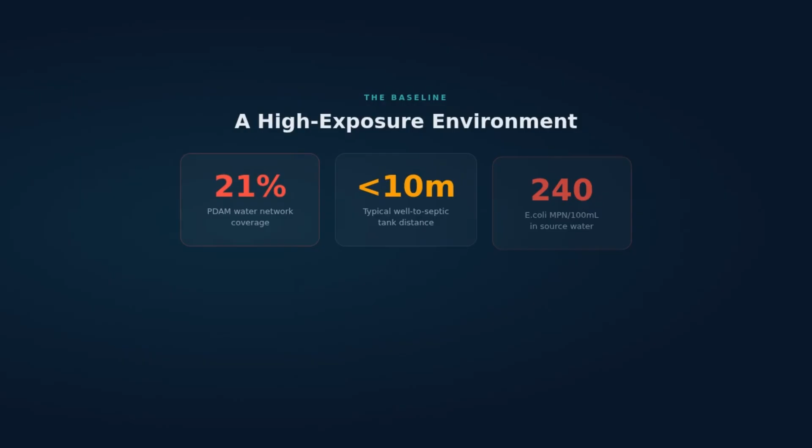Only 21% of residents have formal water service. Most rely on shallow wells less than 10 meters from septic tanks. When floods hit, source water shows E. coli at 240 per 100 milliliters against a standard of 0.

Across 4 disaster phases, clinic data tells the story. During peak flooding, diarrhea surged 79%. Infectious gastroenteritis and colitis emerged entirely new. This is infrastructure failure written in disease data.

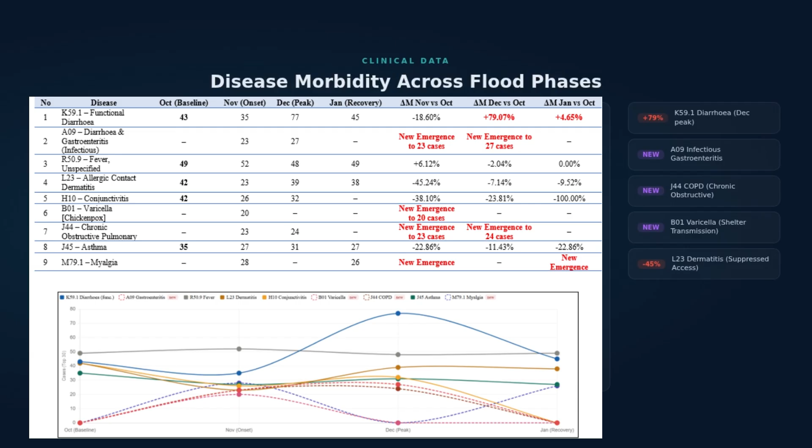Here is the critical finding. Every pollutant individually passes its standard, but sulfur dioxide, nitrogen dioxide, and PM2.5 all target the respiratory system combined. Their hazard index reaches 1.90, nearly double the safe threshold of 1.0.

4 targeted engineering interventions break the transmission chain. Rainwater harvesting bypasses contaminated water. A waste facility removes fly vectors. Drainage upgrades cut stagnant water. And a green belt filters particulate matter.

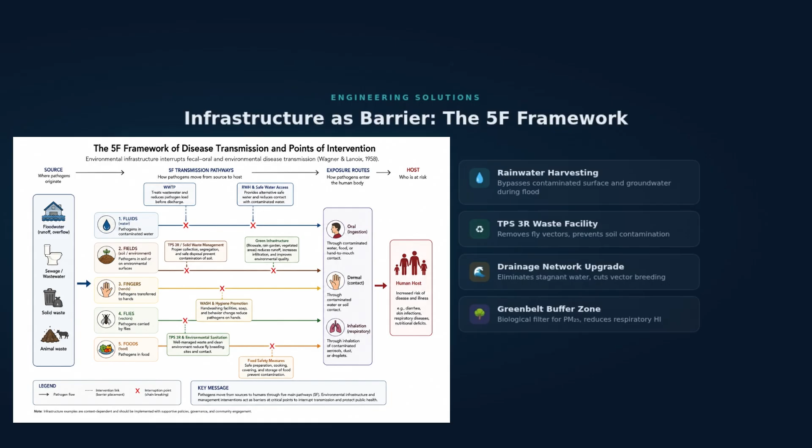Disease responds to cumulative exposure and system failure, not isolated parameters. Infrastructure as barrier - that is the engineering contribution.

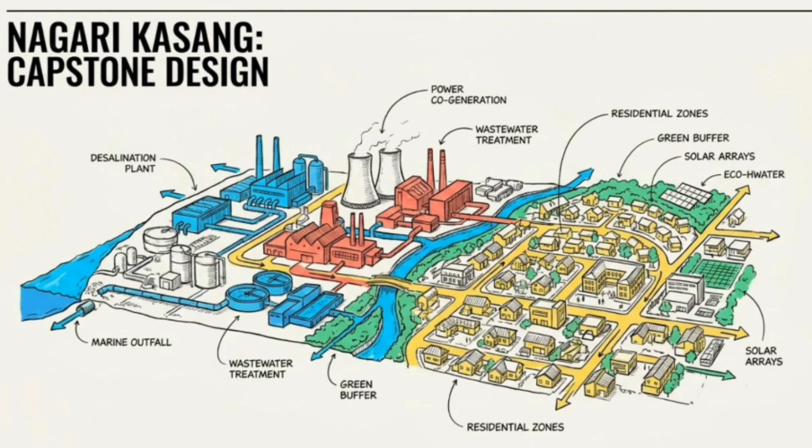Welcome to the breakdown of an integrated environmental infrastructure design. We're looking at a Capstone project centered on Nagari Kasang. The primary objective here is to engineer strict infrastructural solutions that build flood resilience directly into an industrial buffer zone.

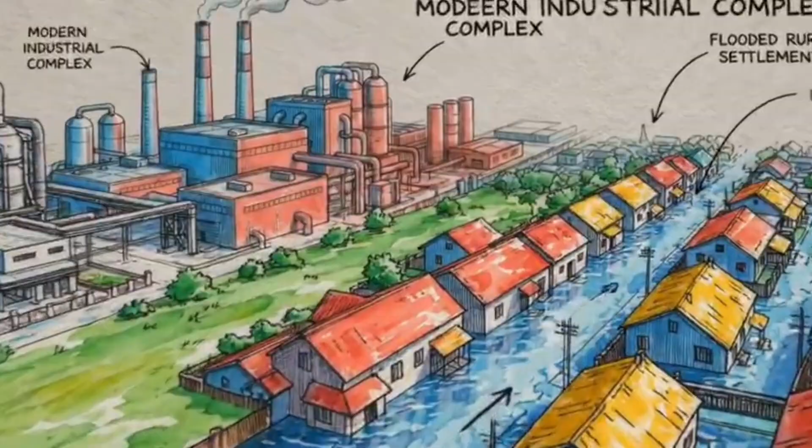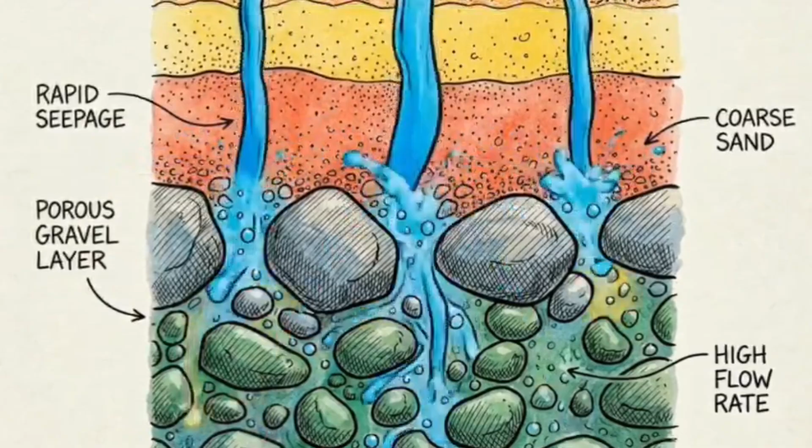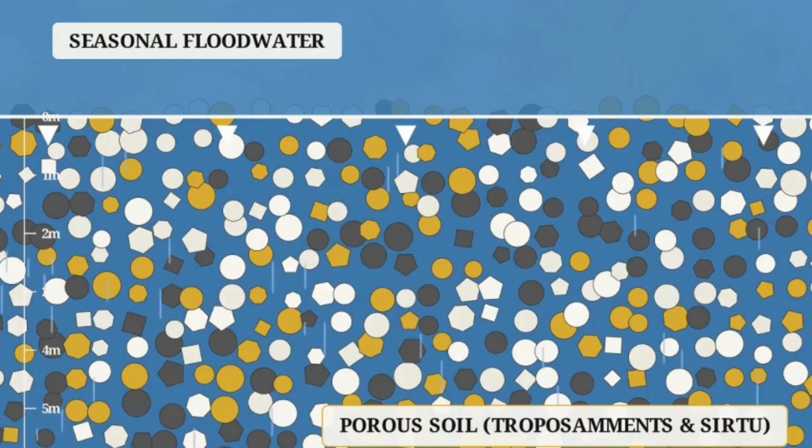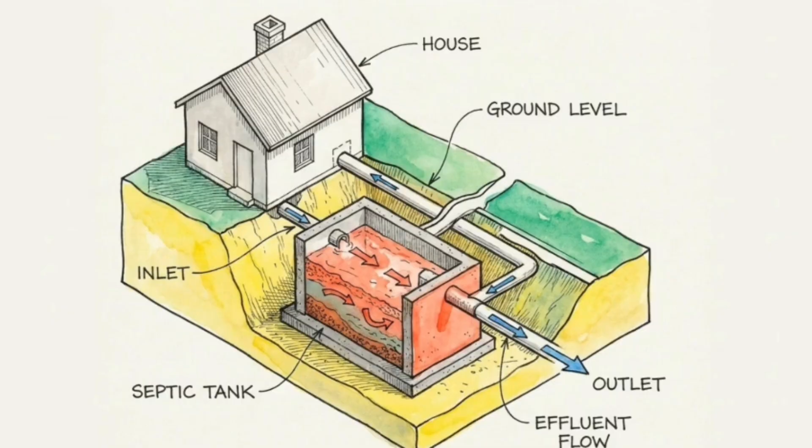Above ground, the demographic reality complicates things. Between 95 and 98% of homes here rely on basic, unsealed on-site septic systems. Combine those unsealed septic tanks with highly permeable soils, and you have a severe structural vulnerability. Any major hydrometeorological event instantly creates a massive risk for subsurface contamination.

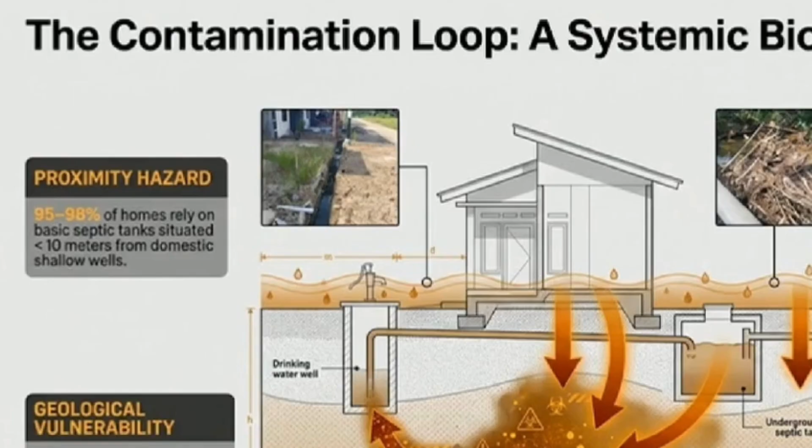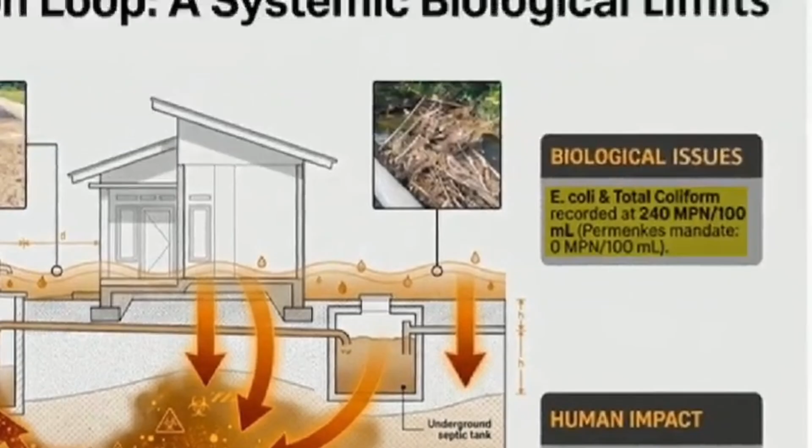Field surveys of the area revealed a specific, severe proximity hazard. This diagram details the proximity hazard. Septic tanks sit less than 10 meters from shallow drinking wells. In permeable soil, this creates a direct underground pathway for pathogens. Tests recorded E. coli at 240 mpn per 100 milliliters, obliterating the government mandate of 0.

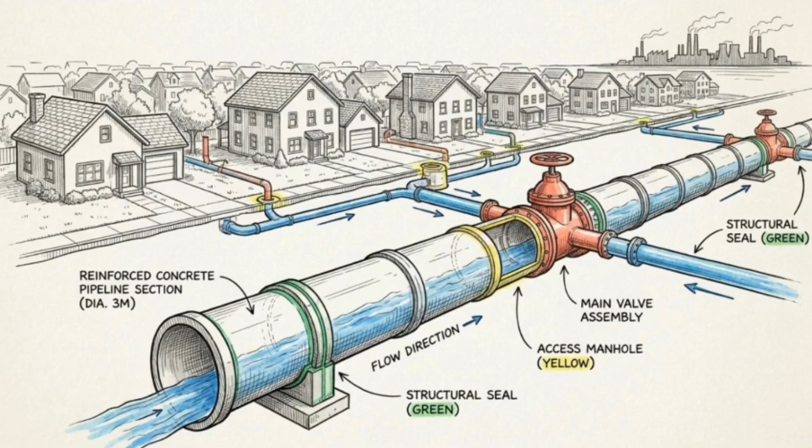To stop the pathogen cycle, a centralized engineering intervention is required. To translate these real-world field failures into viable infrastructural solutions, the team needed a rigorous methodology.

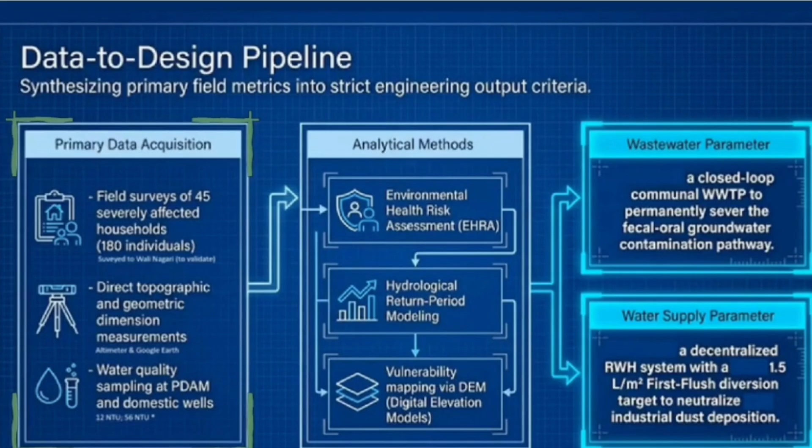This flowchart maps the data-to-design pipeline framework. It begins with primary data acquisition, pulling together household field surveys, direct topographic measurements, and water quality sampling. That data then moves into analytical methods, where a critical step is hydrological return period modeling.

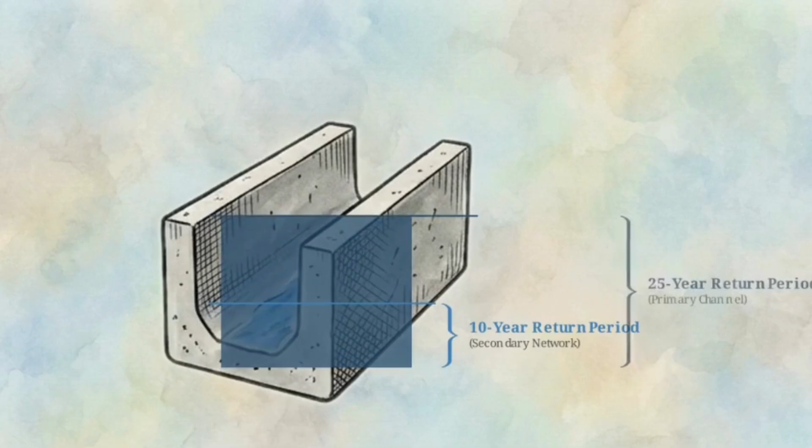The engineers selected strict criteria for this, applying a 10-year return period metric for secondary networks and a 25-year metric for the primary drainage channels. Adhering to those strict return period models establishes a non-negotiable zero inundation standard. Achieving that baseline is a prerequisite before any new wastewater or clean water facilities can be safely designed.

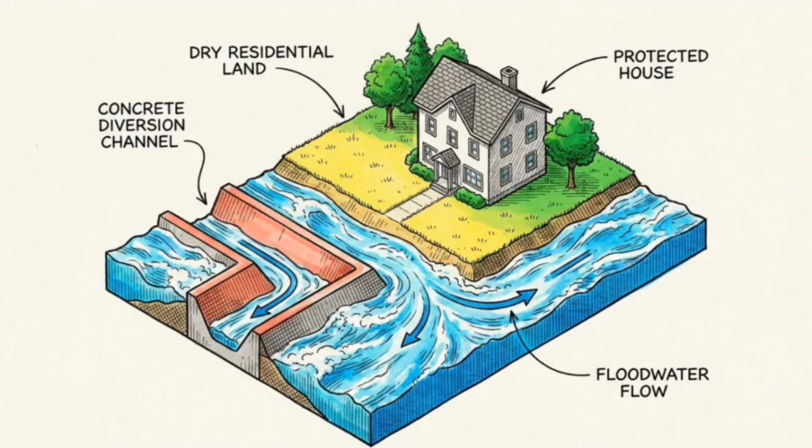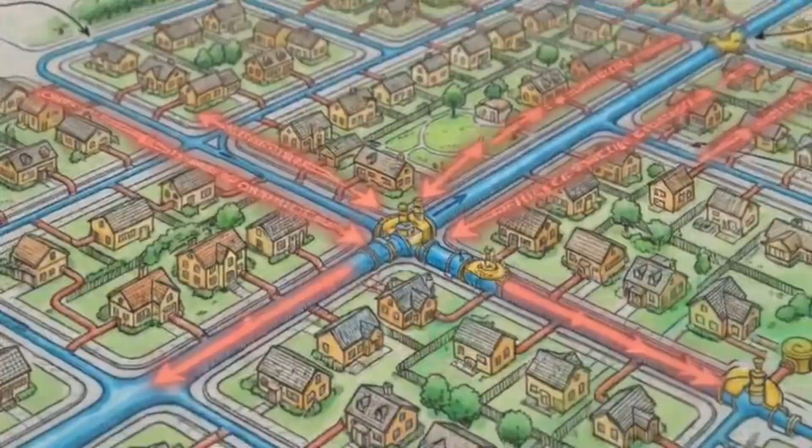The primary wastewater intervention removes the individual permeable on-site tanks entirely, replacing them with a centralized closed-loop network. This map displays the macro-level layout of the proposed communal pipeline network across Nagari Kasang. You can see in the system architecture details how this network definitively routes both gray water and black water away from highly permeable residential soil zones.

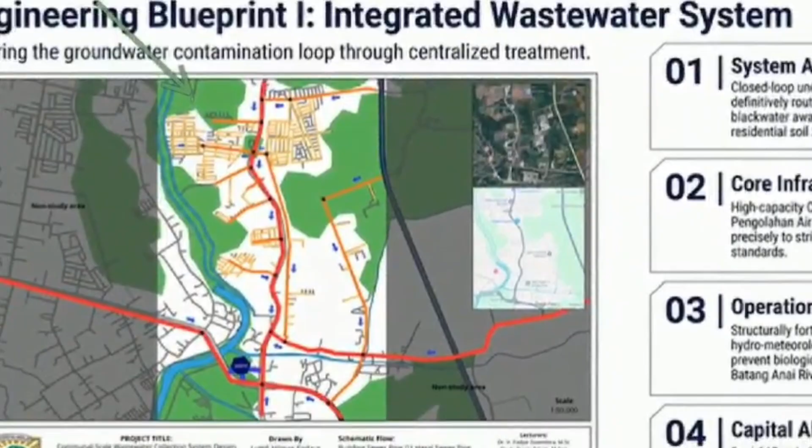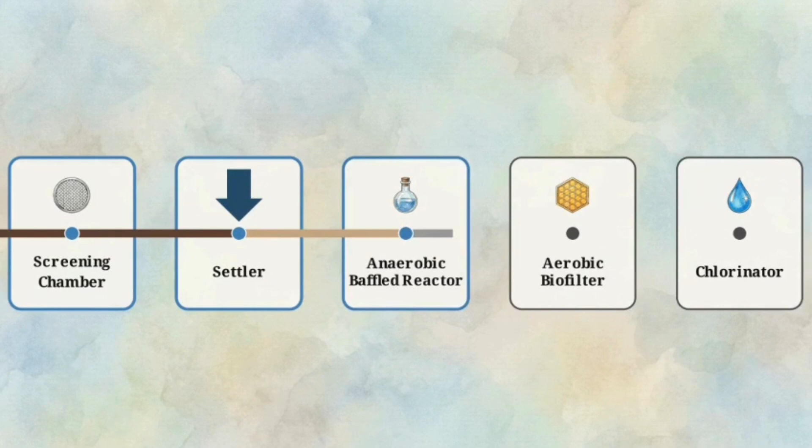The wastewater enters a central treatment plant through 5 stages. The screening chamber filters solids, passing to a settler for sludge. The anaerobic baffled reactor degrades organics. The aerobic biofilter uses a honeycomb structure for secondary reduction. Finally, a chlorinator neutralizes pathogens before safe discharge.

Translating that specific blueprint into reality requires strict capital allocation. The project outlines an allocation of 4.96 billion rupiah, dedicated strictly to excavation costs and the heavy-duty conveyance materials needed for the pipe network. An additional 3.58 billion rupiah is required for constructing the core processing facility itself.

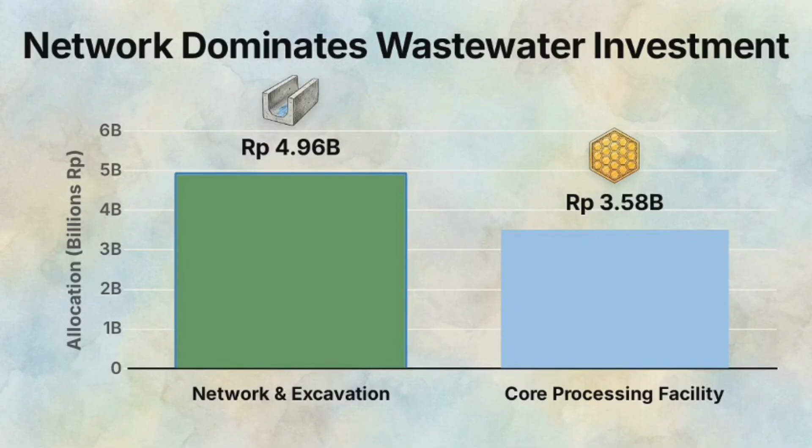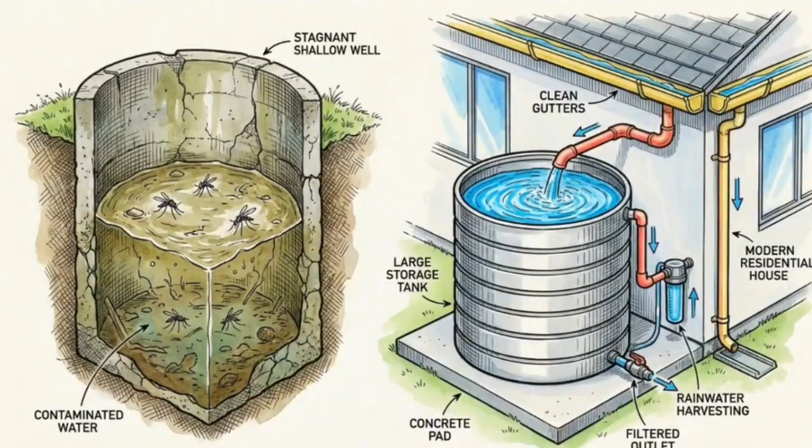Implementing this closed-loop, multi-stage pipeline design definitively severs the hazardous fecal-oral pathway that plagued the community's baseline data. With sanitation secured, the team engineered a secondary infrastructural intervention focused entirely on safe drinking water.

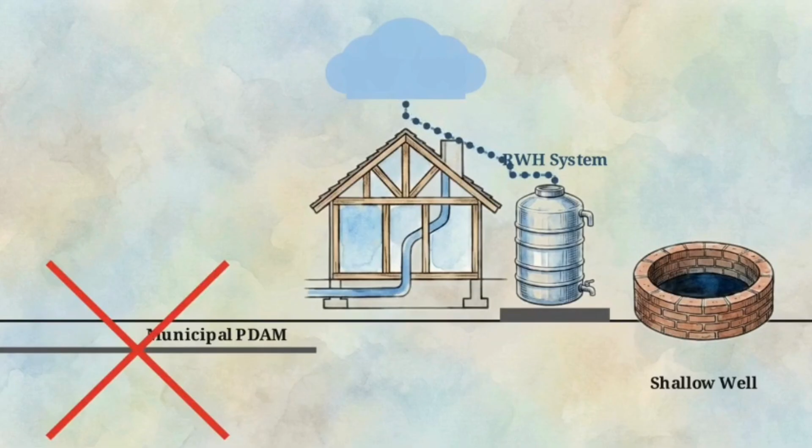The objective here is a decentralized rainwater harvesting system. It provides an emergency water supply that bypasses both the highly turbid municipal networks and the contaminated local wells entirely. The system is designed against a specific demographic load, serving 180 individuals across the 45 most severely affected households. To meet that demand, the system targets a strict operational capacity of 2,700 liters per day.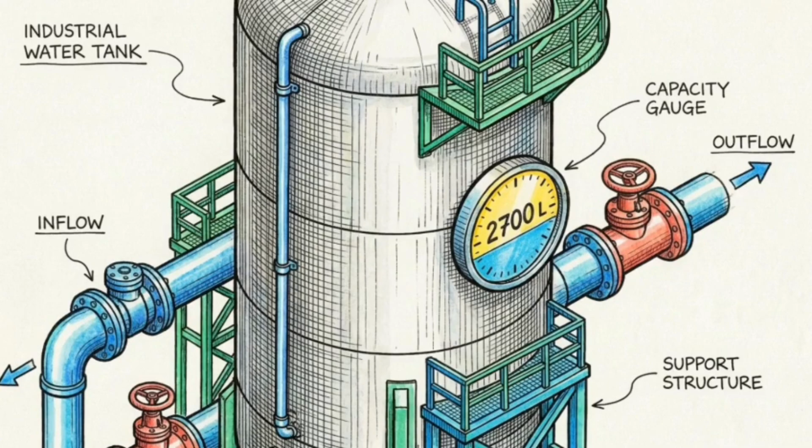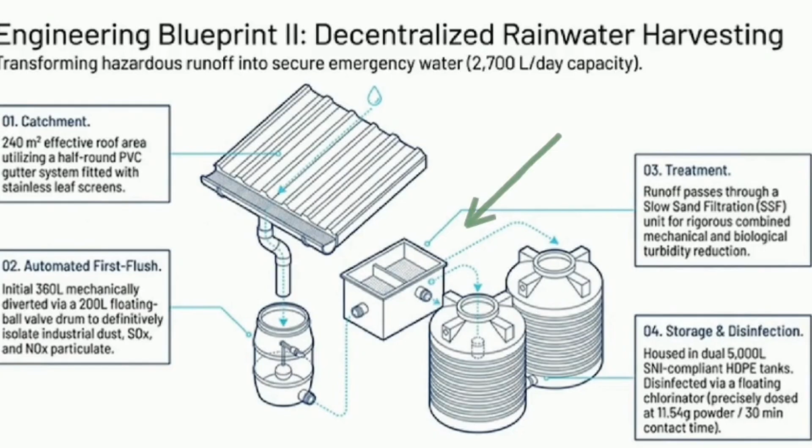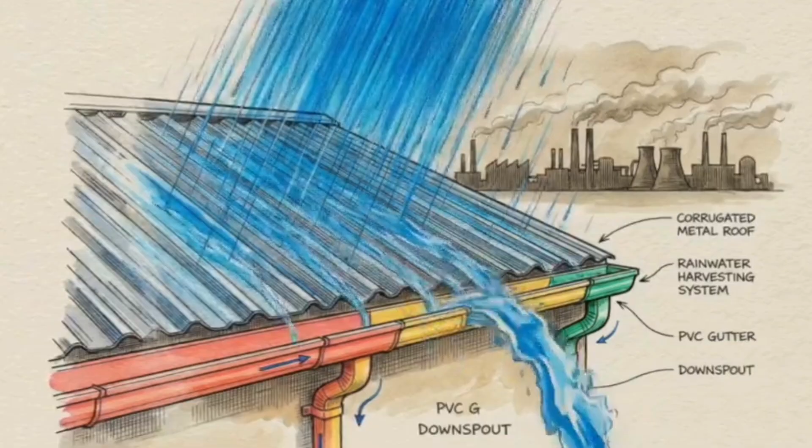This blueprint details the rainwater harvesting setup. Roof runoff enters PVC gutters. A first flush diverts the initial wave, isolating industrial dust. Water passes through a slow sand filtration unit, reducing turbidity, finally entering dual HDPE tanks, where it's disinfected via a floating chlorinator. By integrating those first flush and filtration technologies, the design creates an autonomous, high-quality water reserve specifically engineered to withstand the area's heavy industrial atmospheric fallout.

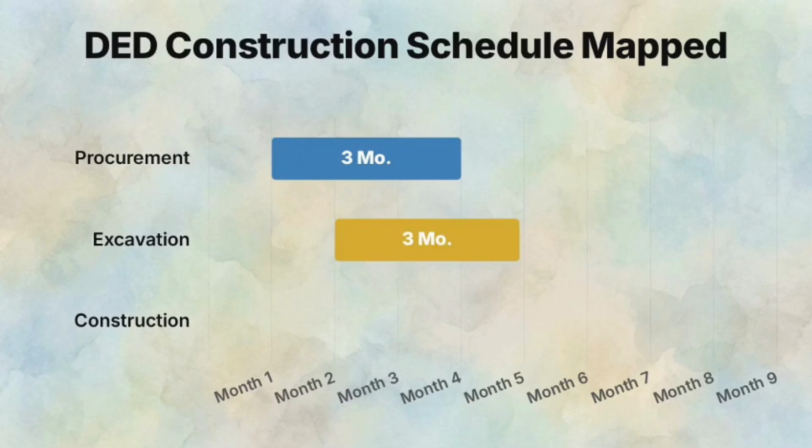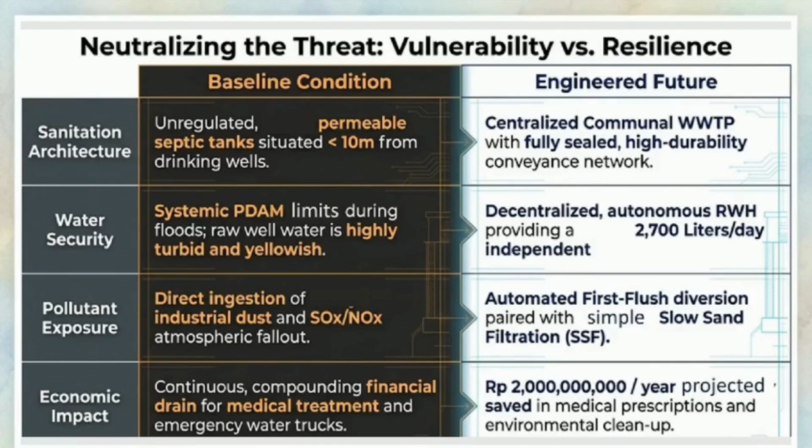Under sanitation architecture, the region shifts from unregulated, highly permeable septic tanks to a fully sealed, high-durability wastewater treatment network. For water security, the system moves past systemic municipal failures during floods to an autonomous harvesting system guaranteeing 2,700 liters per day. Looking at pollutant exposure, the direct ingestion of industrial dust is neutralized by the automated first flush and slow sand filtration pairing.

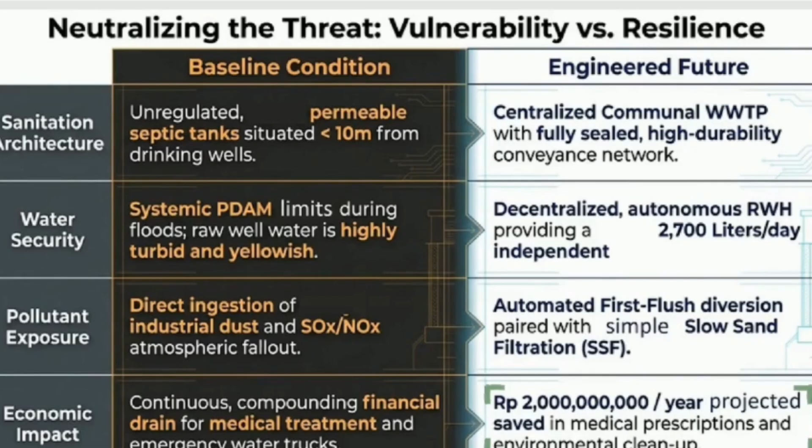But perhaps the most critical metric derived from this engineering overhaul is the economic impact. The model projects a financial return of 2 billion rupiah per year saved in reduced medical prescriptions and emergency environmental cleanup costs. By processing exact geological vulnerabilities and local precipitation data, the team successfully formulated stringent, fully compliant infrastructure designs.

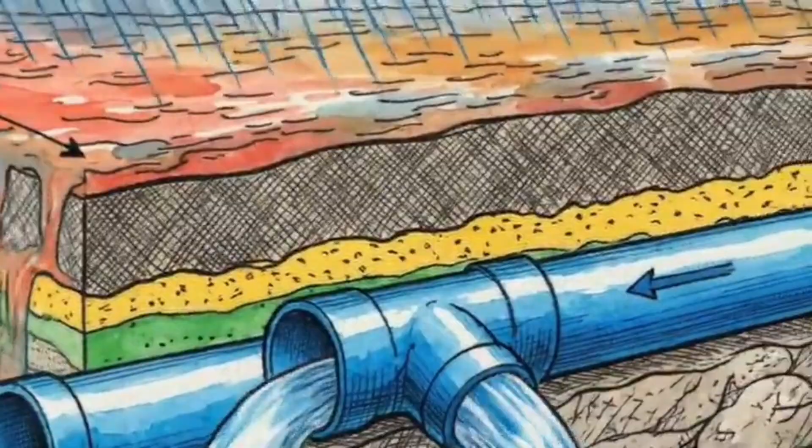This integrated master plan establishes a viable, replicable framework for neutralizing hydrometeorological hazards in some of the most vulnerable industrial buffer zones.

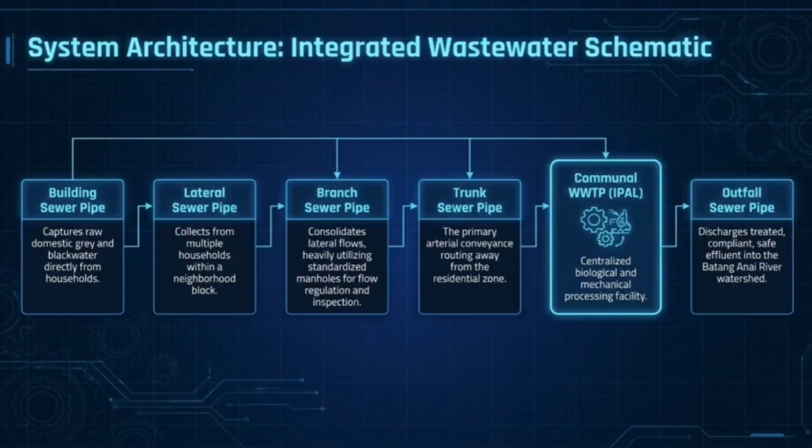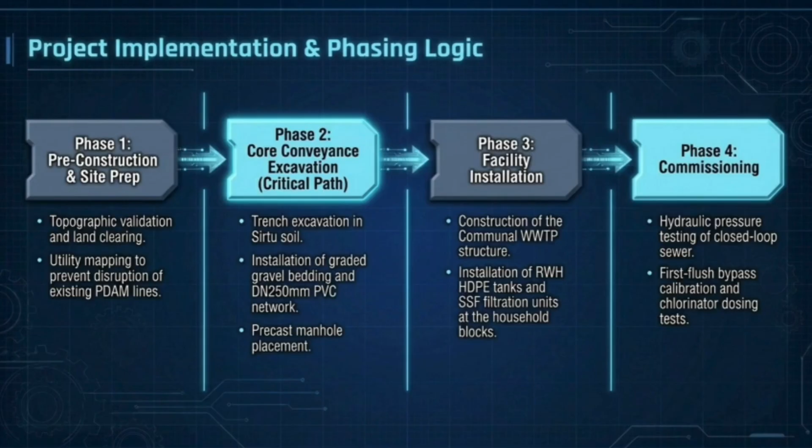Nagari Kasang is an area where industrial activities, transportation corridors, and residential settlements are located in close proximity. This project was conducted to assess existing air quality conditions and develop a preventive mitigation strategy.

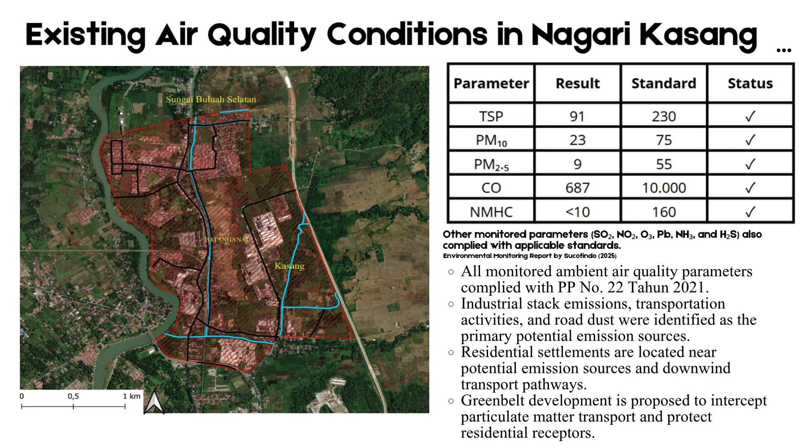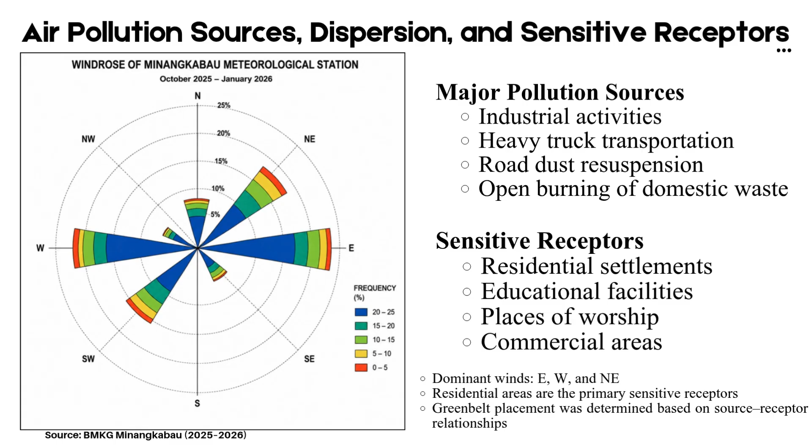Ambient air quality monitoring showed that total suspended particulates, PM10, PM2.5, carbon monoxide, and non-methane hydrocarbons all remained below applicable environmental standards. However, industrial stack emissions, transportation activities, and road dust were identified as potential sources of air pollution.

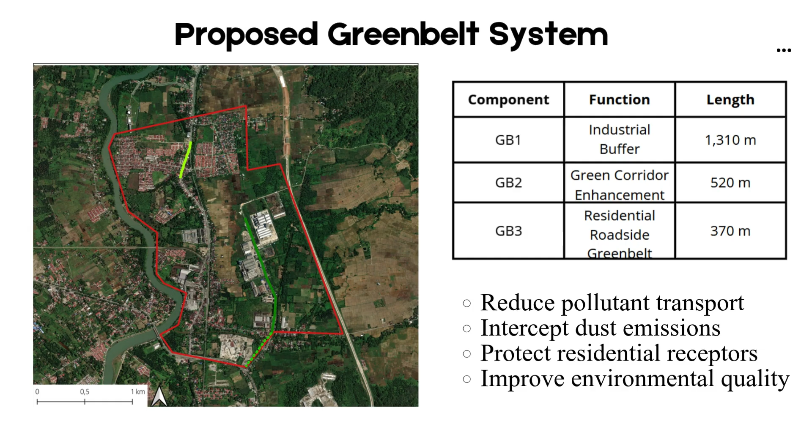Wind pattern analysis indicated dominant winds from the east and west, suggesting that pollutants may be transported toward nearby residential areas. These residential settlements were therefore identified as the primary sensitive receptors within the study area.

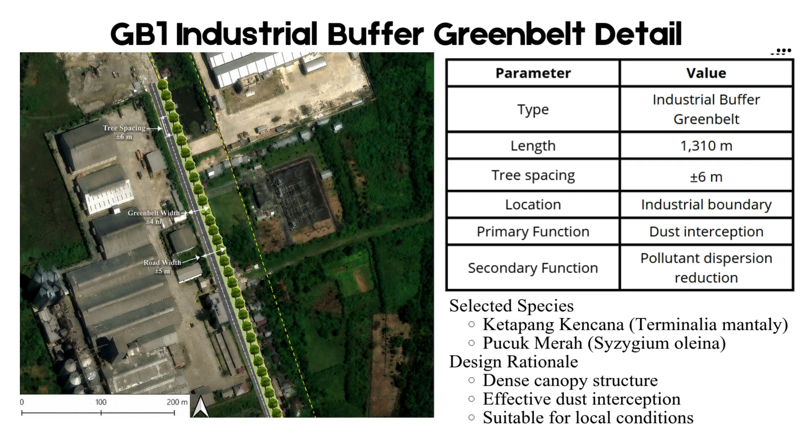Based on source locations, wind patterns, and receptor distribution, a greenbelt system was developed consisting of 3 components. The industrial buffer greenbelt provides protection along the industrial boundary. The green corridor enhancement strengthens ecological connectivity and supplementary pollutant interception. The residential roadside greenbelt helps reduce roadside dust exposure for nearby communities.

The proposed system has a total length of approximately 2.2 kilometers, with an estimated implementation cost of 329 million Indonesian rupiah and an implementation period of 7 months. In conclusion, although current air quality conditions comply with environmental standards, the proposed Greenbelt system provides a practical long-term strategy for protecting surrounding communities and supporting sustainable development.

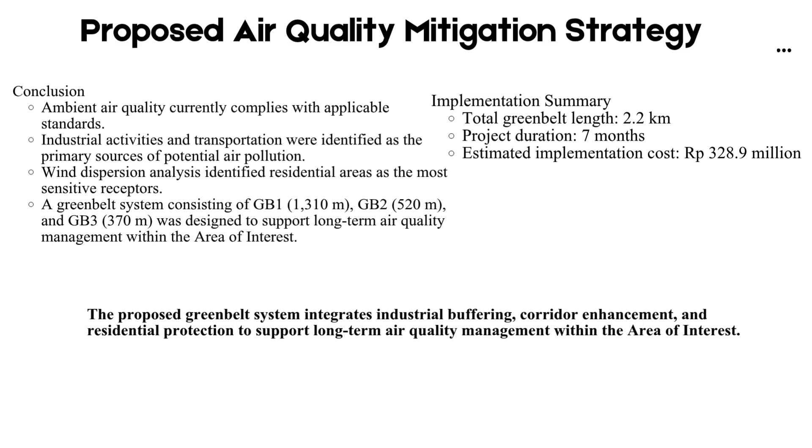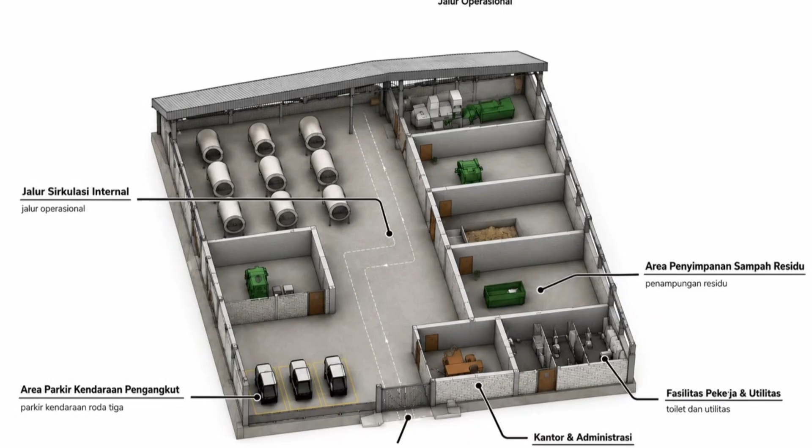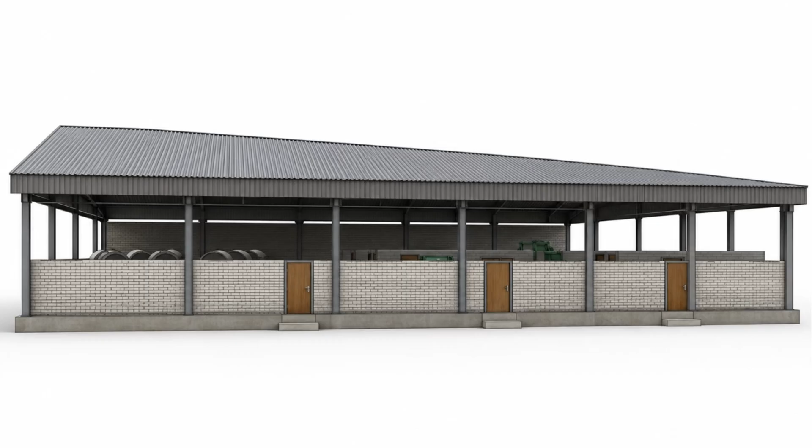The floor plan separates operations into 9 distinct zones. When your collection vehicles enter the main gate, you route materials based on the waste type. You direct organic waste to the receiving area. Next, you shred the material and move it into the rotary drums for composting. Workers then screen and package the final compost product.

You process recyclable materials using the press machine. You must store all leftover non-recyclable materials in the residual waste bin. The facility includes an administration office, worker restrooms, and a parking zone for your collection vehicles. The internal circulation path allows your vehicles and personnel to navigate safely through the site.